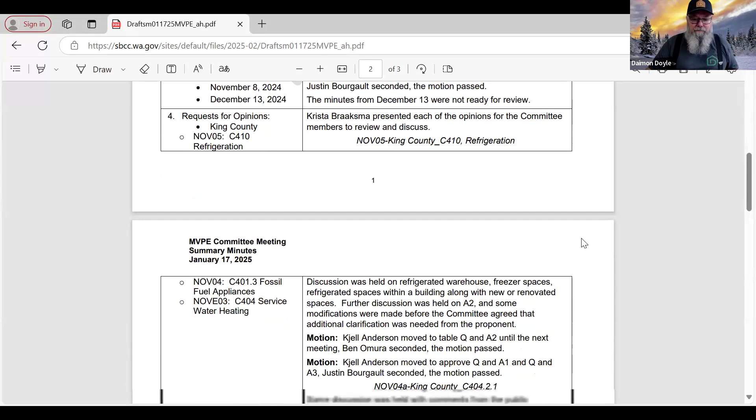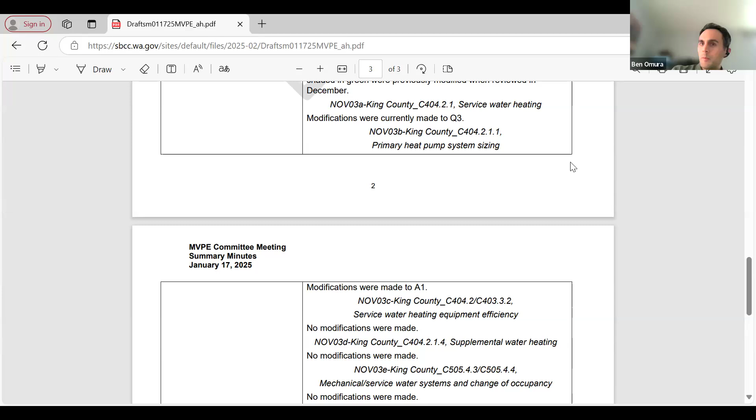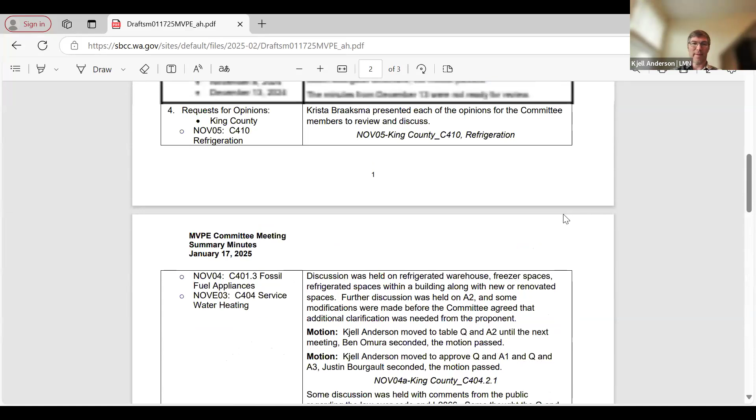There was a link on the meeting agenda and also in the packet online. Is there a motion to approve the meeting minutes from January 17th? So moved. Is there a second? Second. Thank you. Any discussion on the meeting minutes? I wasn't present at this meeting, so I read through. It's just not clear. Nobody's sharing screen. I'm seeing the minutes on the screen. Oh, you are? Okay. I've got my Zoom screwed up then. Okay, hearing no discussion on the minutes from January 17th, all those in favor? Aye. Any opposed? Okay, motion passed. Can we go back to the agenda, please?

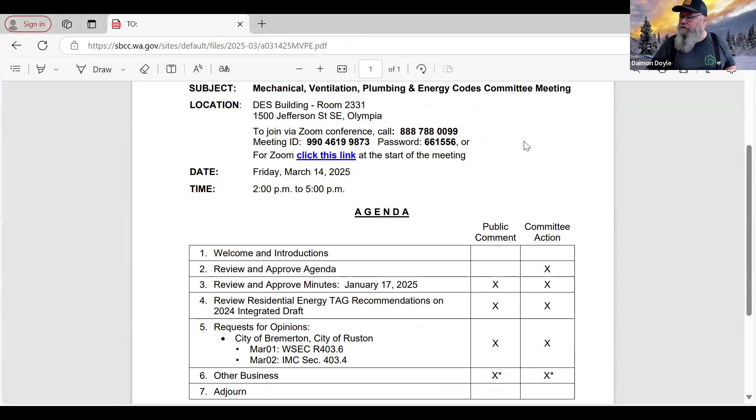Next on the agenda is to review the residential TAG recommendations on the 2024 integrated draft. That also is in your packet. Kjell, I'm going to let you give us a brief overview of what we got here and what we're hoping to accomplish. Sure. I'll probably hand it over to Krista, but basically the residential energy code TAG met twice to review the integrated draft, which is the document that code proposals will be accepted against. So it's by no means final code.

We take the Washington State Energy Code 2021 and we compare it against the 2024 model code and take, in general, the most stringent areas. We can also clean up a few things if we want. So that's the process. The TAG then votes for all the changes that go through. There's a lot of discussion. We met for more than 8 hours. Along with this, there's a letter and a significant changes report. When TAG members or staff thought a change was significant, that was noted in the report. That's in a nutshell what we did, where we are, and the document.

If it passes this committee and the council, it will then go out for a CR 102 to accept code change proposals against. So the code is at the very starting gate of the whole process. Wonderful, good summary. I'll note that the TAG, as shown in the second paragraph, in addition to the integrated document, also moved forward the 2024 IECC as presented as an option to submit comments against and to possibly adopt. Is that correct?

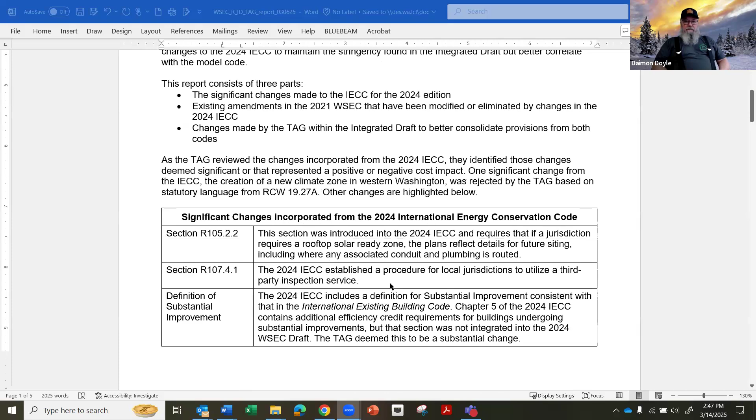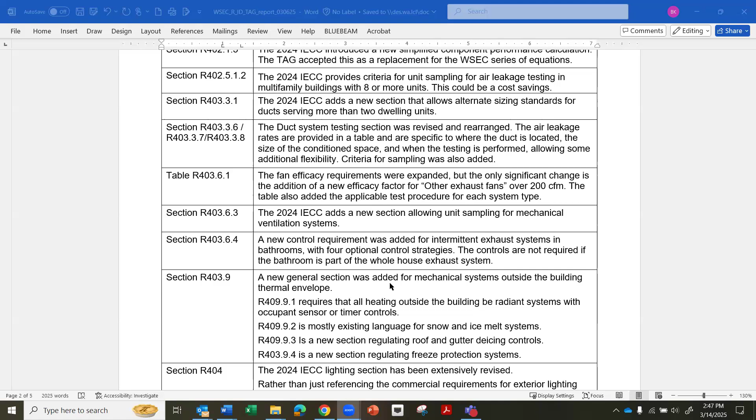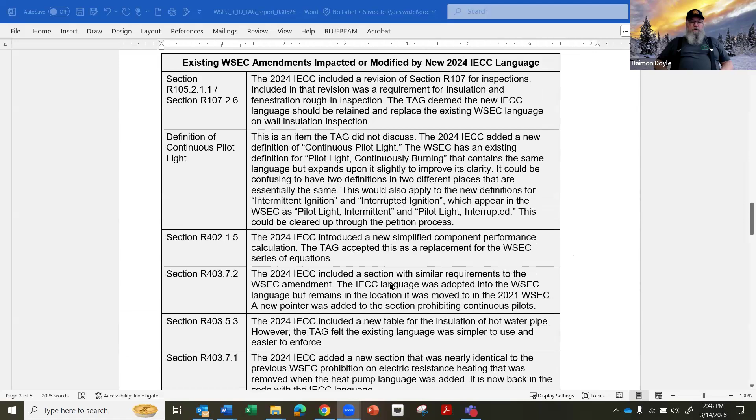Chair, go ahead. Go ahead, Todd. Thank you, everyone, for the... Can you hear me? Yeah. Thank you, everyone, for the discussion. Todd, I'm afraid we're losing you. Todd, I know you're driving and we're losing you. If you come up to a better reception, please feel free to chime in, assuming you can hear me.

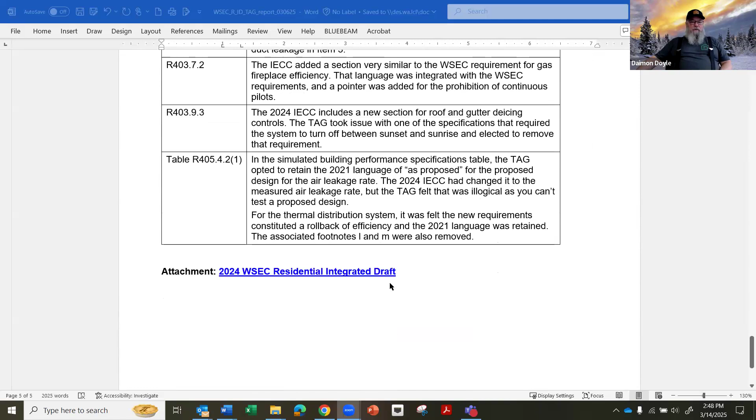Okay, is there anything else in this report that people would like to comment on? I guess we've already made a motion and passed it, so we'll pull up the agenda and move on to the next thing if we could, please. Okay, next item on the agenda is 2 requests for opinions. If I could ask staff, if I were to hand the gavel to someone else, would we still have a quorum?

Yes. Okay. Would somebody volunteer to take over? My apologies for not being able to be here, but I have a big presentation to make and misunderstood the timing. Ben, would you like to take over? I'd be happy to take over, although I'll note I do see Jay on the call now. Yeah, except I'm not a member of the committee. I'm just here to get a... I didn't realize the website still has you as chair. Yeah. Okay. Jason's eavesdropping. Okay. Ben, if you'd be so kind as to take over to look at the 2 opinions and conclude the meeting, I'd appreciate it. Absolutely. Thank you, everybody, for your time, and I will see you at the next go round. Thank you.

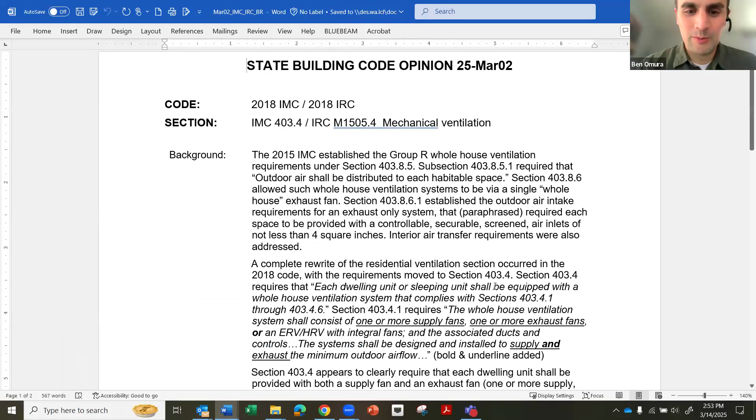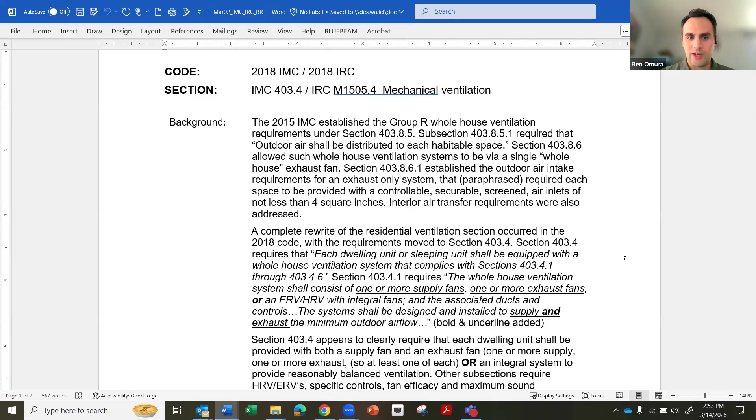All right, so this one's a little bit more complex, and there's two questions in this one, I believe. And this is for 2018 IMC and 2018 IRC regarding mechanical ventilation. And you can see the background on the screen here. Michael or others, if you want to walk us through the background here since you're on the call, that'd be awesome.

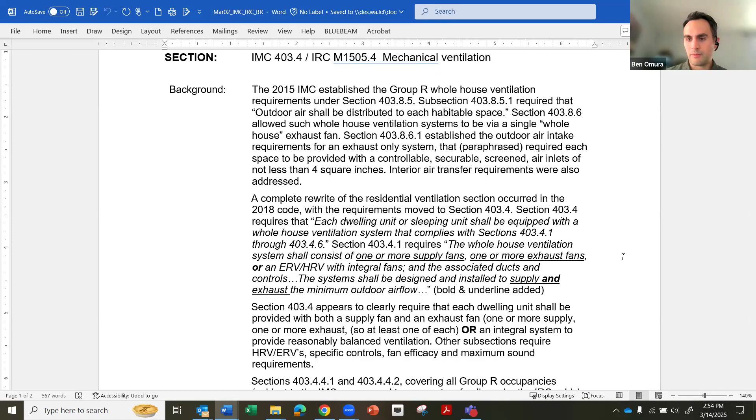Okay. Sorry, I was gathering some thoughts for the other question. This one, actually really all of these: in 2015, essentially for your fresh air requirement there was a section in the code that allowed for what we all knew of as either through-the-wall ports or window ports, the little slidable pieces on the windows, all the air ports, etc. The code for decades has excluded the natural ventilation of opening a window.

And back in the 2015, with the window ports and all of that, there was a provision that required those air opening inlets to also be securable. So, like a window that could be secured at a 1-inch opening could satisfy it, but just natural ventilation of opening a window could not. In 2018, that whole section went away from the code. There were extensive changes in the 2018 that drove a lot of that.

And what ultimately ended up was the sentence where the whole house ventilation system shall consist of one or more supply fans, comma, one or more exhaust fans, comma, or the ERV. Also in that whole thing, it required the ducted fresh air to every habitable room. So, they kind of worked hand in hand with that.

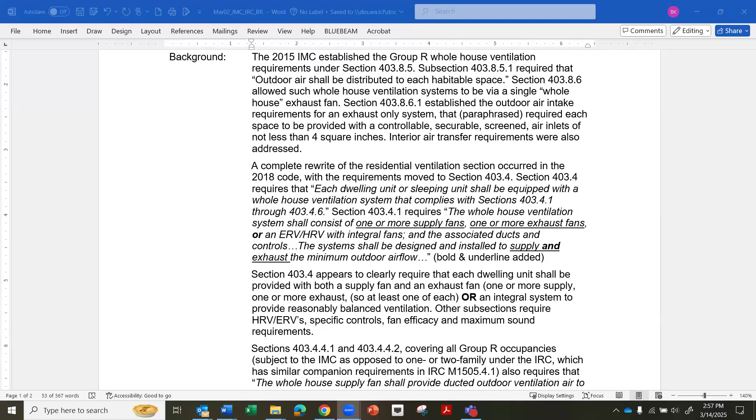So the whole house supply fan shall provide ducted outdoor ventilation air to each. And then the non R2, you know, is different. So I assume, let's see, the answer actually, I don't contest any of that. I think the answer is consistent with what we were thinking and where we were seeking some clarity.

I guess when I wrote the question, I was thinking more on the group R, as opposed to just the R2. But the R2 is where we're experiencing some challenges in certain submittals. Essentially, people wanting to revert back to like the 2015, I'm going to open a window provided for this. We're interpreting this whole provision as, well, no, you have to provide fresh air to each habitable room.

Code does require the ducted outdoor ventilation air to each habitable space within the residential unit. We're also under the impression that the group R2 also requires that component to be done with a heat recovery ventilator, regardless of what energy options are selected. And obviously, if you're a single family home, you have other options, but in a multi-family R2 building under the mechanical code, this is essentially what becomes required.

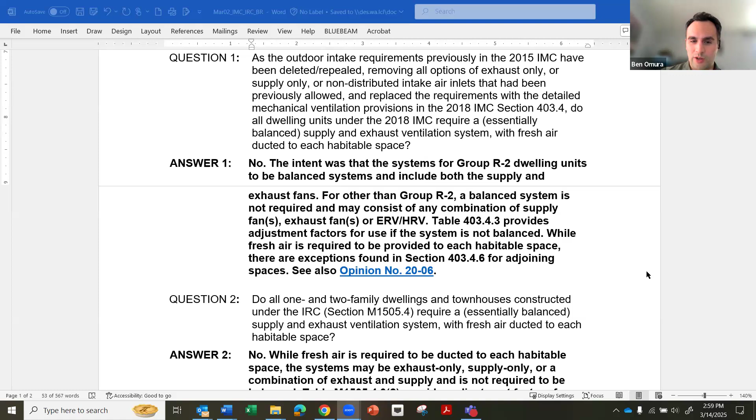Let's see. And Michael, if you want to leave it there for now, maybe we open up to the attendees and the committee members, unless you had any other quick thoughts before we discuss. No, I'm fine there. Okay. So for question one, this is regarding the 2018, and Chris, is it the same for the 2021 IMC language for the state amendment? It's close. I don't think it's exactly the same, but I think that sentence still reads the same.

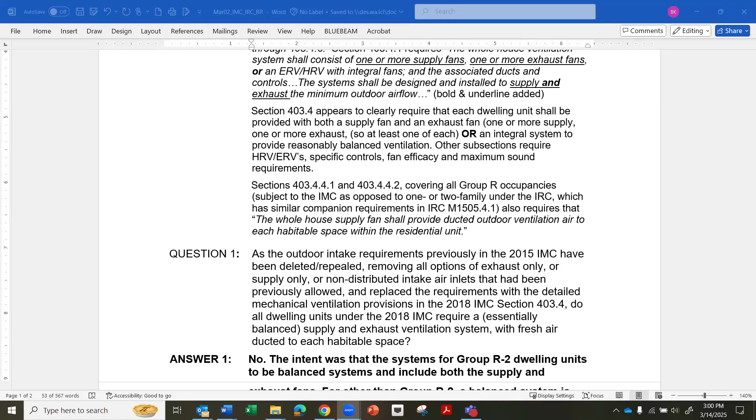So the question regards 2018 IMC section 403.4, and the underlying question: do all dwelling units under 2018 IMC require a supply and exhaust ventilation system with fresh air ducted to each habitable space? The proposed answer staff have developed is no. The intent was that systems for Group R2 dwelling units be balanced systems including both supply and exhaust fans. For other than Group R2, a balanced system is not required. It may consist of any combination of supply fans, exhaust fans, or ERV, HRV.

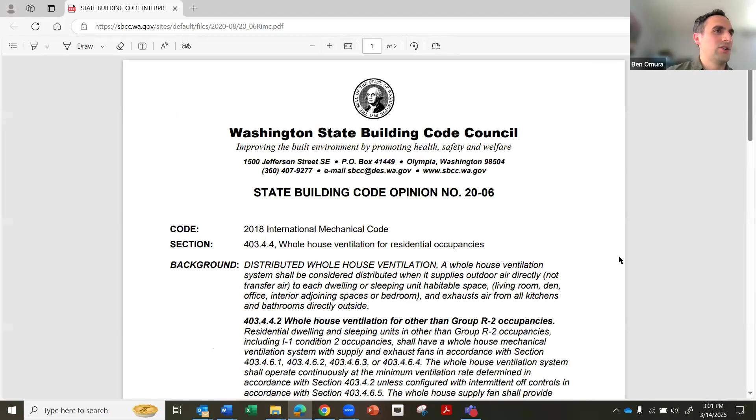Table 403.4.3 provides adjustment factors for use if the system is not balanced. While fresh air is required to be provided to each habitable space, there are exceptions found in section 403.4.6 for adjoining spaces. And then reference to previously issued opinion 20-06, which dealt with a similar question. However, it was more focused on the distributed or not distributed question, rather than the balanced or not balanced question. And yeah, we saw that opinion.

All right. So let's look at question 1, answer 1 first. Any discussion from committee members or other attendees regarding this?

And I guess something that you'll see for some of the 2024 proposed amendments to the IMC is that there are several clarifications that were introduced as proposed options for this section to improve the wording and clarify the intent. So that will hopefully reduce questions in the future.

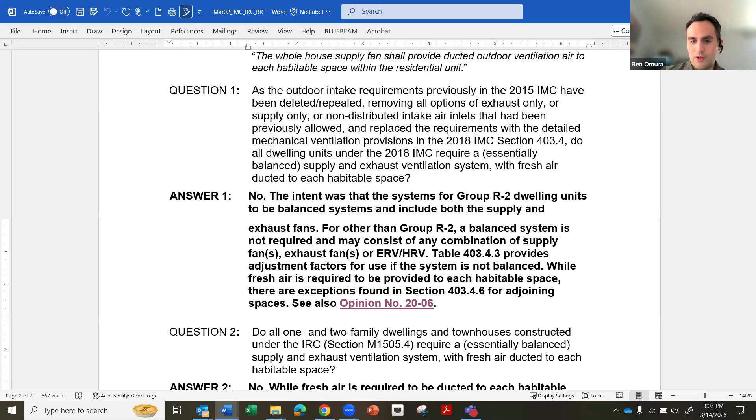All right. I guess for the committee members that we have, we could definitely look at this one as a single question and make a motion based on that, or look at the second question and do both of them together. Don't hear anything. Let's move to the second question.

So question 2 is regarding all 1 and 2 family dwellings and townhouses, and construction under the IRC, which is under section 1505 of the IRC for ventilation requirements. And it's asking if they require a supply and exhaust ventilation system, essentially balanced in parentheses, with fresh air ducted to each habitable space.

And the proposed answer here is no. While fresh air is required to be ducted to each habitable space, the systems may be exhaust only, supply only, or a combination of exhaust and supply, and is not required to be balanced. I guess for that sentence, Krista, the balancing requirement applies to all 3 scenarios, I believe. Is that correct?

I think that you would only have to be balanced if you had both exhaust and supply. If it's all exhaust or all supply, there's no way to balance the system. Okay, yeah, I was just wondering if we want to try to clarify that that only applies to the exhaust and supply situation, and not the exhaust only or supply only option. Michael, go ahead.

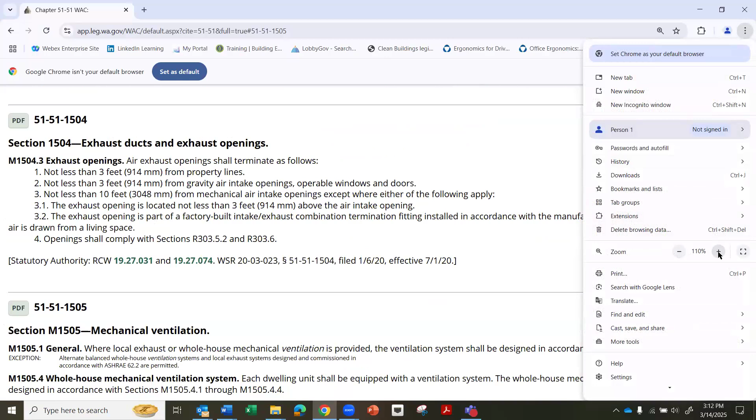Okay, thank you for the education. That's helpful. Not sure it was an education, probably more just an earful, but. It was for me. My mind's full today, though. All right, Eric. Hello.

Yeah, so Eric Vander Mey, just listening in, trying to sort this out. So yeah, the code language does say the whole house supply fan shall provide ducted outdoor air to each habitable space. The language in the mechanical code is clear. I mean, each habitable space, I think, appears multiple times. And like I said, that has been cleaned up for the 2021 code.

So if you're going to allow exhaust only systems, you could provide an interpretation that says exhaust only is acceptable, but you have to have outdoor air supplied to each habitable space. It would be a clarification of the code, essentially. So if you're going to allow the exhaust only, going back to precedent from previous codes, you would have trickle vent inlets in each habitable space. So that could be an interpretation or a way to do that, or it could be overstepping the code. You kind of have to decide what you want to do there.

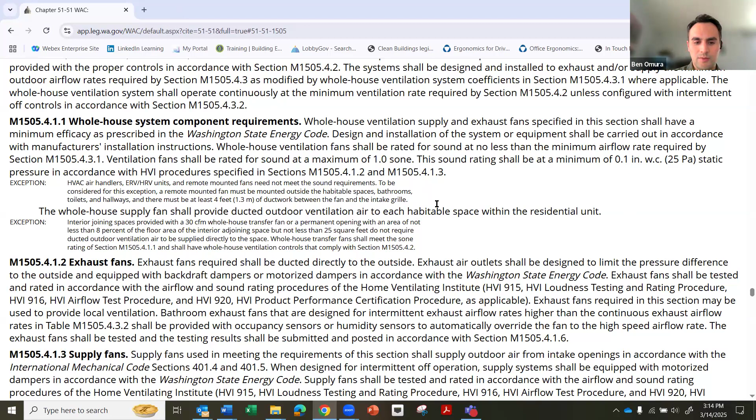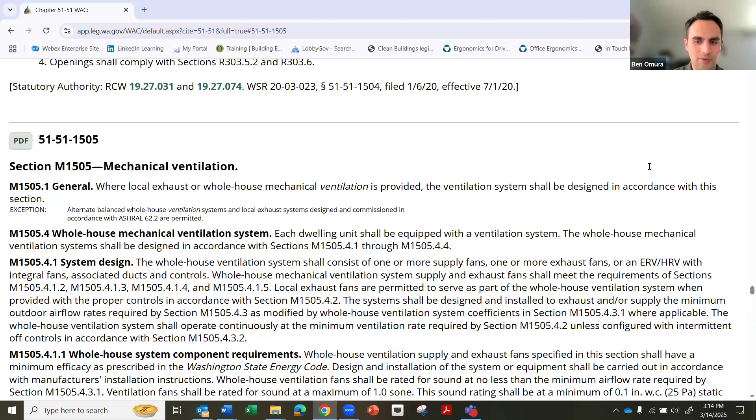All right, thanks, Eric. And yeah, as we're seeing on the screen, my understanding is that right now the language says whole house supply fans shall be ducted to each habitable space, but it doesn't seem to provide clarity on what would be required for the exhaust only type of configuration. So if you go back to precedent from the 2015 code, you could leverage that. It was an oversight how this was written.

Right, with the 2018 change, it kind of got rid of the air inlet requirements that were previously part of it. Correct. There was a lot of last minute rewriting of the 2018 code. We were focused on the mechanical code and then tried to adopt the language back to the residential code with a little bit more flexibility in the residential code. It's clear in the 2015 code that each habitable space has to have outside air delivered to it. So again, you could provide an interpretation that that's still required. Or opinion.

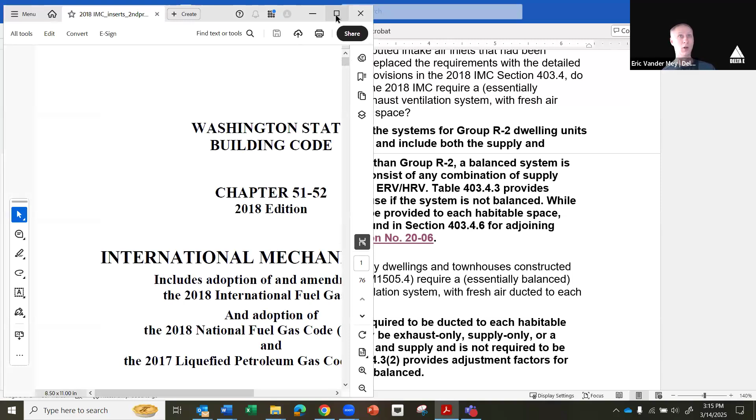Michael, go ahead. Yeah, and that's really what we're after here, because when I read the sentence structure, I too am involved in code development, and I know a lot of you from the different committees throughout, we'll call it decades of doing this. And when it was changed from 15 to 18, I don't know if it was just overlooked, but that whole section was actually struck. So it was struck intentionally to eliminate those and replace them with this fresh air requirement that required the ducted fresh air to each thing.

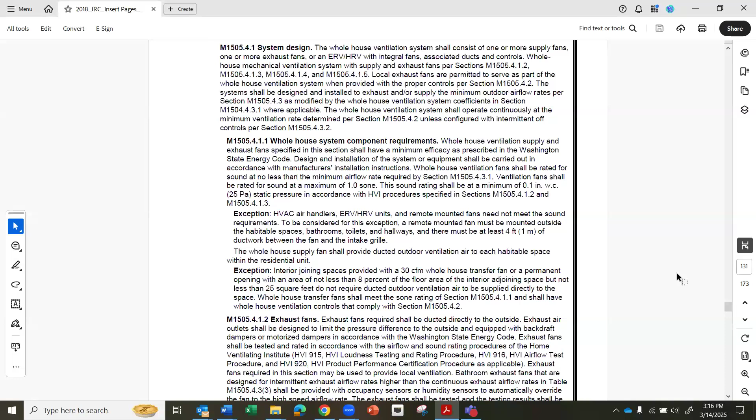And so I think, in my opinion, for the interpretation, the sentence structure was very specific in that you had to have supply fan, plus, the plus isn't said, you have to have exhaust fan if you're going that route, or you do a combination unit that does both, hence the ERVs, that both exhaust and supply are required. So, for example, if you did just a supply only system, you're supplying pressurized fresh air to each habitable room. Well, that air is going to go somewhere, and then one exhaust fan somewhere else in the building could alleviate that pressure and essentially balance the system.

But you can't do the opposite with one exhaust fan, because you can't duct fresh air to every room in that situation. So hence the sentence structure that says you have to have supply fan, you have to have exhaust fan in any number greater than 0. In my opinion on that. You can't have 0, but you have to have any number of supply fans, any number of exhaust fans that are greater than 0, which ultimately is what we know of as balanced systems. It's not saying it's a balanced system, but it is saying that if you have to provide ducted air to every room, then that has to be ducted air to every room.

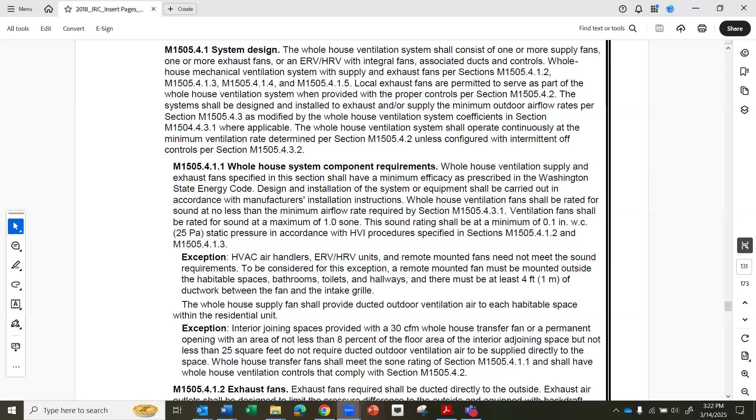So sorry to keep going, sorry to ramble and take everybody's time, but yeah, it is a difficult code conundrum that has left us with a couple of different challenges in several jurisdictions. So again, thank you. I appreciate it. Appreciate it, Michael. Eric, go ahead.

Yeah, I guess to reiterate what Michael's saying, that is my understanding. The intent of the code from the 2018 was to require the ducted filtered supply. It of course has the flexibility that would be more consistent with the other interpretations that were made on the 2018 code for the mechanical code. So that would not allow an exhaust only system. You would not require an ERV. You would require a supply fan that has filtered air going into each habitable space.

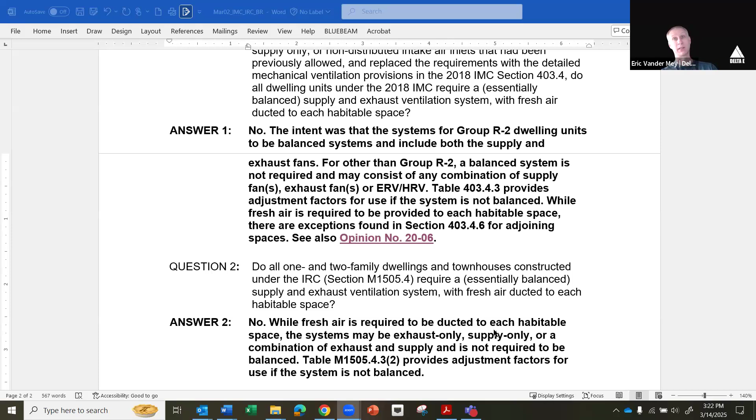So you have supply fan and exhaust fan or the HRV. So that's the sentence you're trying to interpret, how the or is applied, and that's all you're interpreting. That is what it boils down to. Yes.

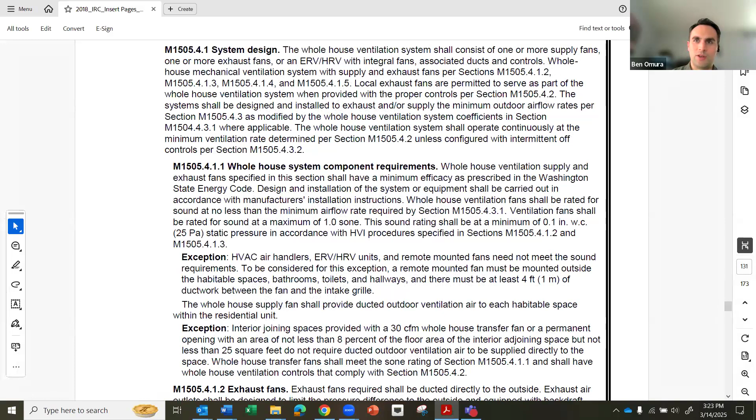Yeah, I guess the second part of the question is if it's required to be balanced, which I think we can clarify based on the adjustment factor table, that it's not necessarily required to be a balanced system. But I think this interpretation point and the main clarification here is to provide guidance based on the intent for if an exhaust only system is available as an option for the 2018 and 2021 codes.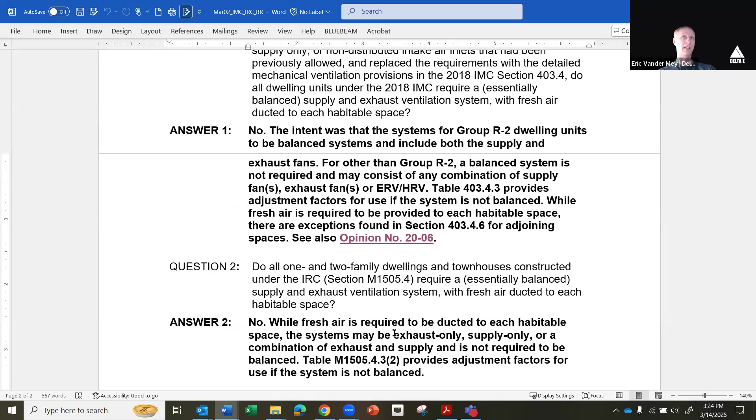Yeah, I would say the intent of the code proponent was no, it's not. Exhaust only was not an option, if we go back and look at the code proposals. And if I may, what I would assume then for an answer to the question could be: no, it is not required to be balanced, but yes, it does require both a supply fan and an exhaust fan to satisfy the code requirement.

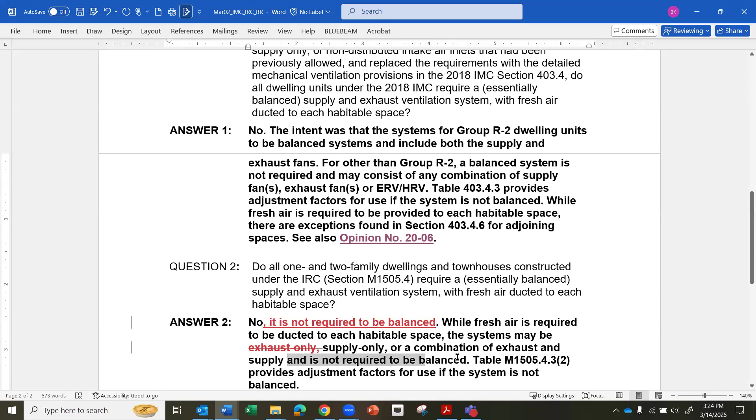And it's really not supply only, right? Because you have to have supply and exhaust. I mean, I guess you don't. Well, you're saying, can you just do supply only and not do any exhaust as part of your whole house system, make all your exhaust part of the local exhaust system?

Yeah, it does ultimately make it a combination of exhaust and supply, however you look at it. It really can't be just supply only because you've got exhaust somewhere. And it can't be exhaust only, but the combination works. And because it doesn't have to be balanced, that can be any number of supply fans, or maybe one supply fan ducted to everywhere, and then any number of exhaust fans to relieve that air.

So that is probably how, it's not really a supply only, it is a combination system in that circumstance where you have a supply fan, but then you have 4 different bathrooms, each with bath fans that are being taken into consideration for the relief of that. So technically that is a combination system.

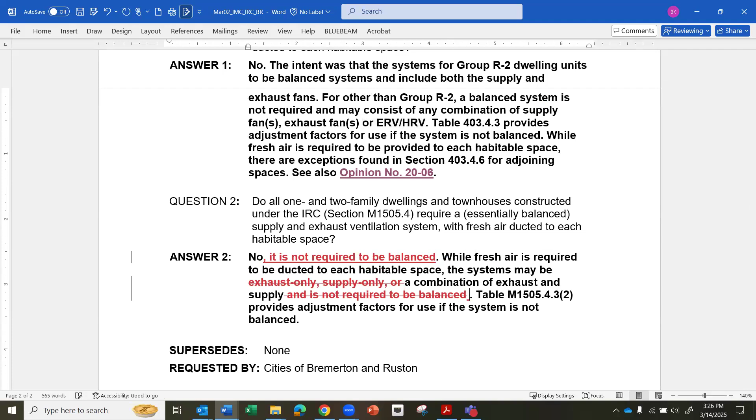I guess I would look back at the top section 1505.4.1 where it's describing the whole house system operation to maintain the minimum ventilation rates that are outlined later in the code. And based on the interpretation that we're saying those elements are required to be part of that whole house ventilation system, it would seem, if we were to follow that, both of those supply and exhaust elements would have to operate together to maintain that minimum airflow rate.

I think that's where they could make an argument with the balancing. If they were interconnected, then yes, that would be typical of a balanced system. But if it's allowed to be unbalanced and you've got a supply fan supplying air to everywhere and you've got 1 or 2 exhaust fans running at various times, then that would be what we would all consider to be an unbalanced system,

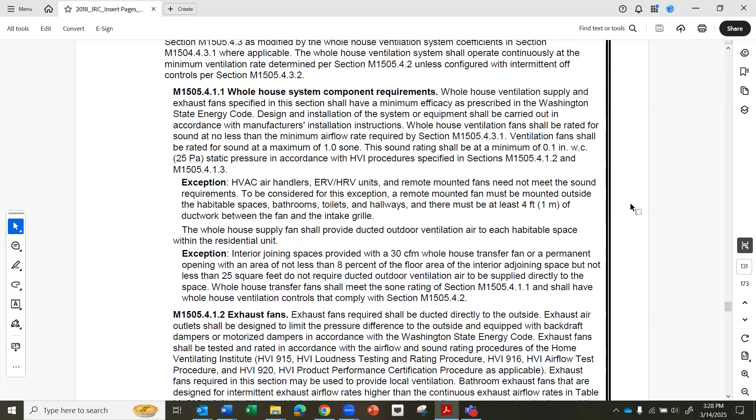which theoretically could be allowed based on that, because if it's not specifically requiring a balanced system, but it is requiring both supply and exhaust, then that's what that could look like, in my opinion.

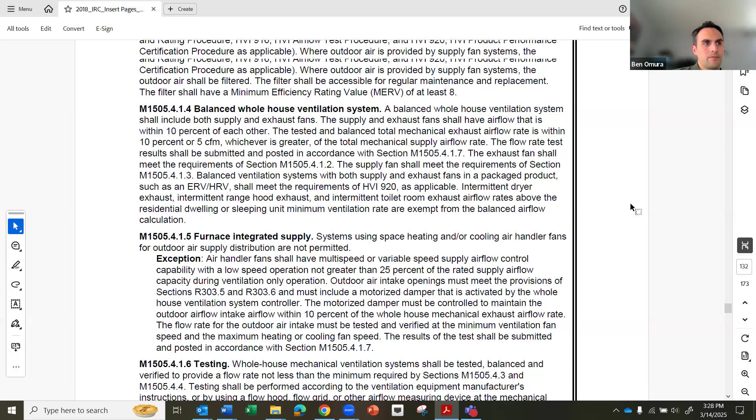Yeah, I mean, I think you can lean on that second sentence in that paragraph that says whole house mechanical ventilation system with supply and exhaust fans. It says you've got to have both in that sentence. And it also says that local exhaust fans can act as part of the whole house ventilation system. Yeah. But it's very clear in the second sentence that you have to have supply and exhaust fans, and then you go to the applicable sections. It doesn't say supply or exhaust fans in that sentence.

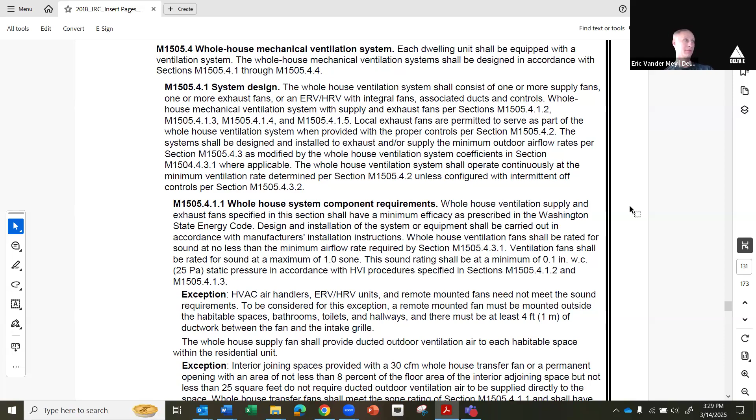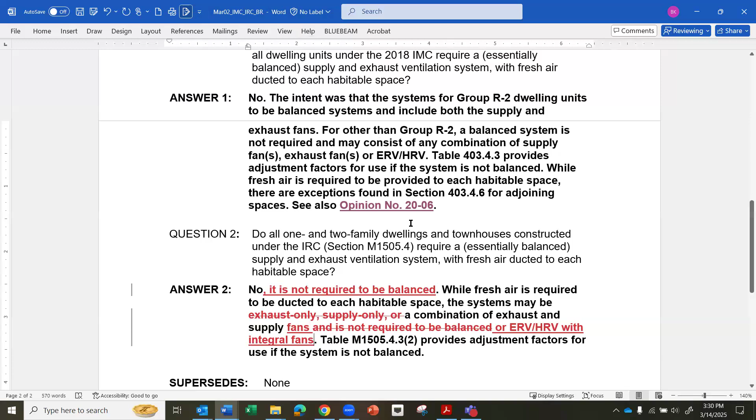So, of course, I'm not on the committee, so I won't necessarily offer the wordsmithing, but yes, I agree very much with Eric's assessment of that. I think this matches the intent of what the code change proponent was trying to accomplish.

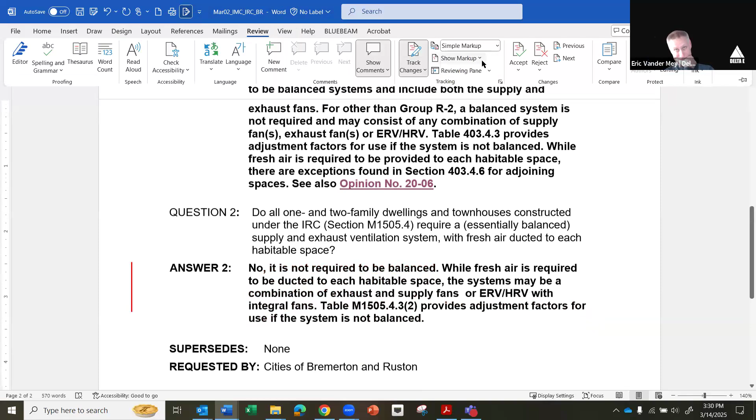And maybe Krista, we change the second sentence to get rid of the while, just put fresh air is required to be ducted to each habitable space. And systems may be a combination of exhaust and supply fans, or ERV and HRV with integral fans. And then I guess you could move the table reference after the first sentence.

And then I guess, do you think we need to put in a clarification that fresh air is required to be ducted to each habitable space by the supply fan system? Just adding that at the end of the sentence. But otherwise, Eric, Michael, do you feel this kind of matches the intent that you've seen from the code? And Eric, you probably know or remember some of the discussion that went on when this proposal was introduced.

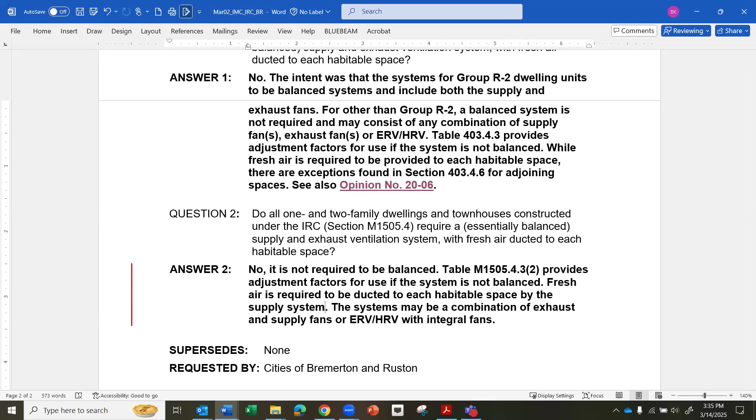Yeah, and just to clarify, the intent here is to approve the opinion as the committee, right? Not forwarded to the council? I believe so. Yeah, sounds like it. That makes sense to me. Yeah, the idea is we can approve it today without going to the council. Just want to clarify that that's the intent. Yep. All right, so we have a motion on the table to approve this opinion and publish the interpretation. Is there any further discussion? And to clarify, this is for both answers 1 and 2. Correct. Thank you.

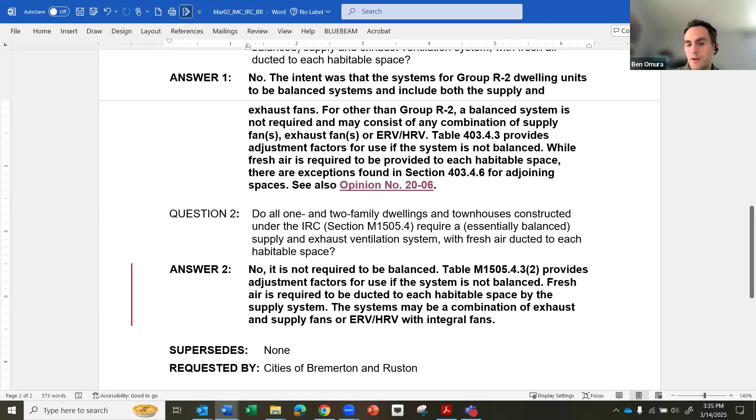All right, hearing none. All those in favor, please say aye. Aye. Aye. Any opposed? All right. Hearing none, motion carries. All right. So we only had those 2 opinion requests. Correct. All right. So we're going to go to agenda item 6, other business. So any committee members or members of the public have any items to bring up that were not on the agenda?